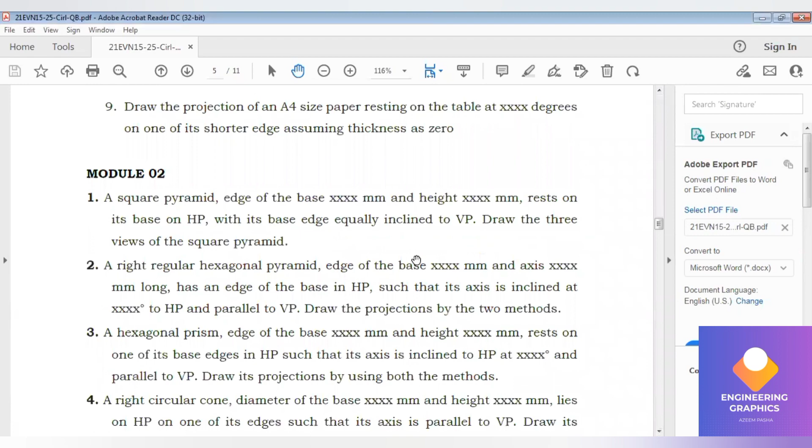You can see that it is from the VTU. So we will move on to the development of lateral surface of solids. Okay. So we have completed the isometric.

So you can see in module 4, the first question is: a pentagonal prism of side dash mm and height dash mm has one of its faces parallel to the VP. It is cut by a plane perpendicular to VP and inclined at dash degree to HP, passing through the axis at a point dash above the HP. Draw the development of the lower portion of the solid.

So first I'll be constructing an XY line here. We know that prisms will be constructed using the parallel line method. So draw the XY line. Okay. So go to polygon by center command. Select number of sides 5. Okay. Select thick line and place it so that one of the sides is parallel. So this is how we have to place it.

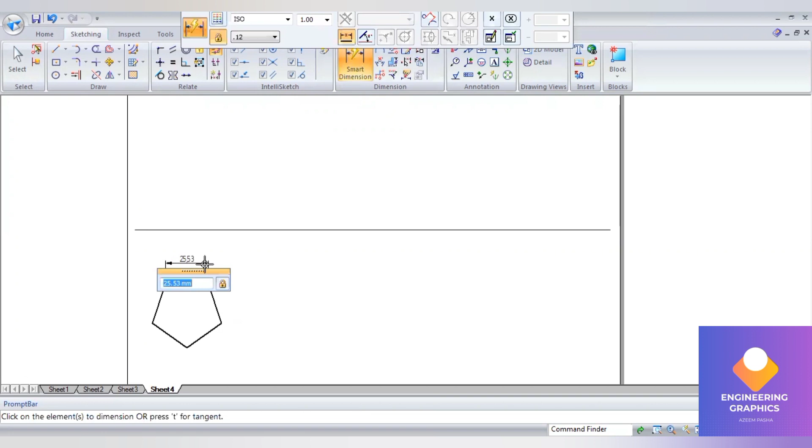Now I am changing the dimension to 30. Okay. This is the pentagonal prism resting with one of the edges parallel to VP. Now draw the 3 perpendicular bisectors to find out the center of it. Now give the namings here. It has both a top face and a bottom face. Top face notations are A, B, C, D, E, and bottom face notations are A1, B1, C1, D1, and E1, and those should be written within brackets.

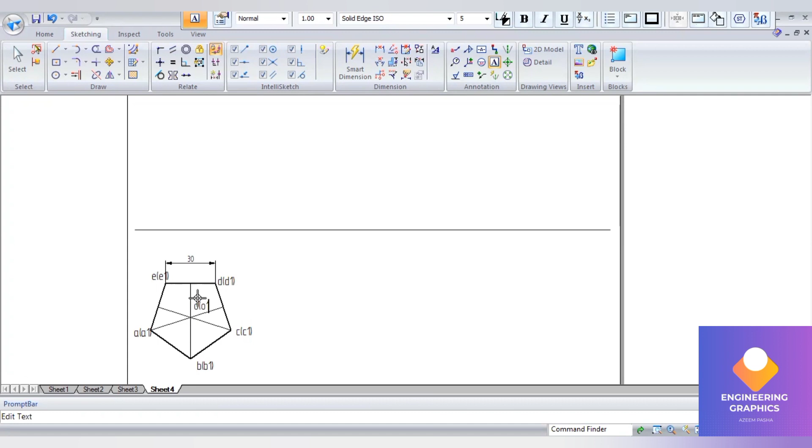Okay, after writing the notations, we should draw the projection lines. So take 0.13 mm thickness line. So draw the projection lines. For the axis length, we will give 60 mm. 60.

So construct the front view. We know that in the prism, the front view will be a rectangular face. Okay.

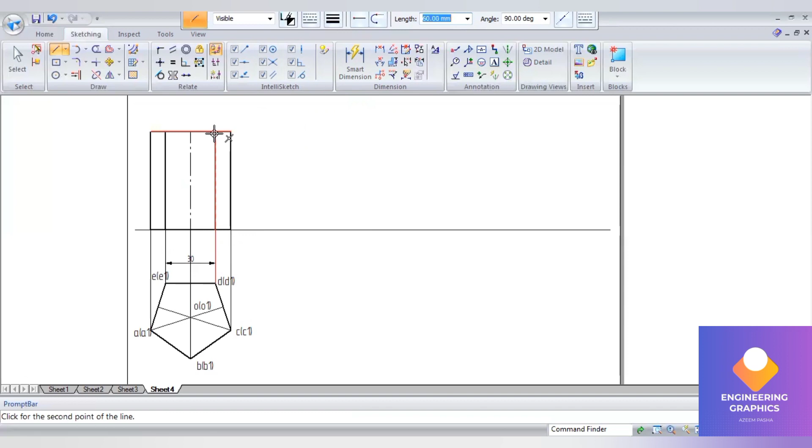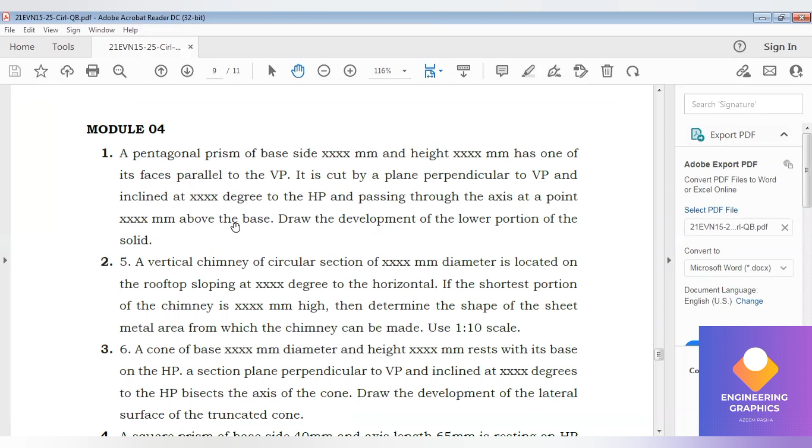Now it is cut by a plane perpendicular to VP, inclined at dash degree to HP, and passing through the axis at a point above the HP. So here, from the bottom face, I'll be considering a distance of some 30 mm, and here I'll be drawing an angle line from the middle point of it. Okay. So here we can choose the angle randomly. I'll choose 40 degrees.

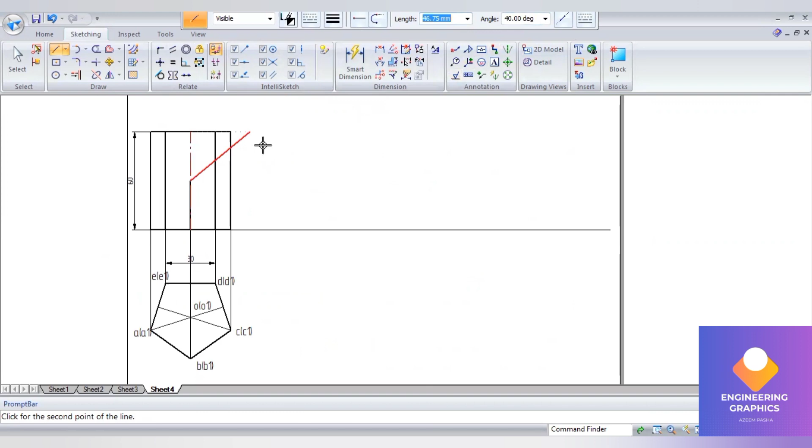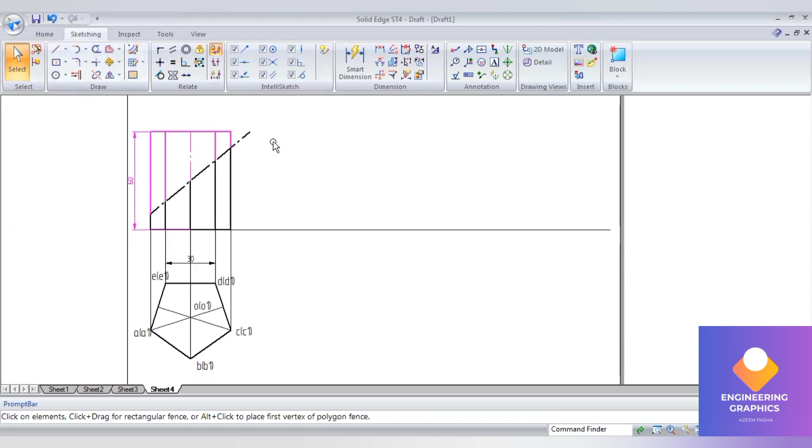Construct the cut plane, and then extend it so that it shows where it will be cut. And now using the split command, you can split wherever you want. Then make the upper portion thin, because the retained portion is what we need to draw the development of. So I'll be selecting that upper portion and making it thin.

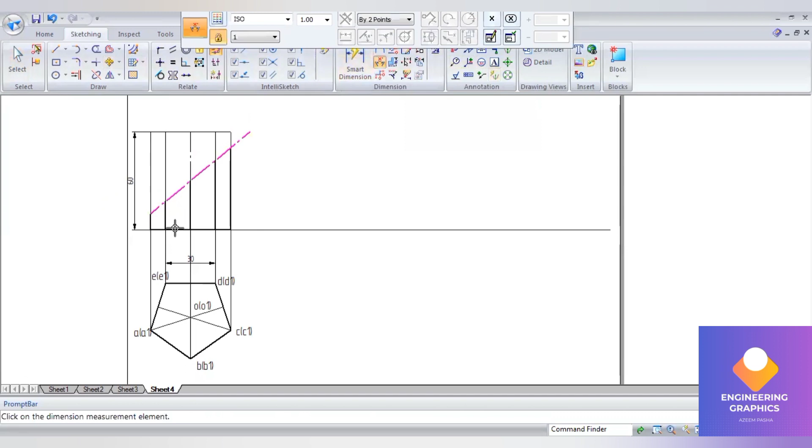Now you can write down the notations for the cut plane. You can check the angle. The angle with respect to HP is 40 degrees. Now I can write the cut plane namings. So here it is 1 with respect to the vertical edge. No, it's not cutting there. Actually, the cutting is happening exactly at the vertical edges, not in between. I'll correct it.

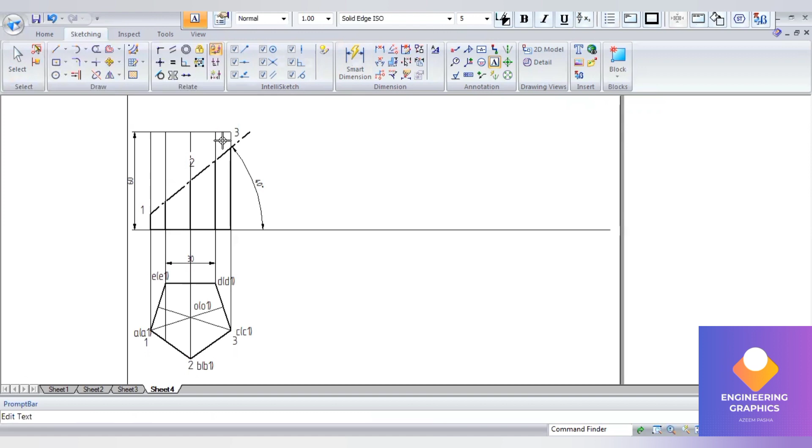Okay, exactly at BB1 we have cut point 2, and exactly at CC1. So 1 is cutting at vertical edge AA1, 2 at vertical edge BB1, 3 at vertical edge CC1, 4 at vertical edge DD1, and 5 at vertical edge EE1. Okay.

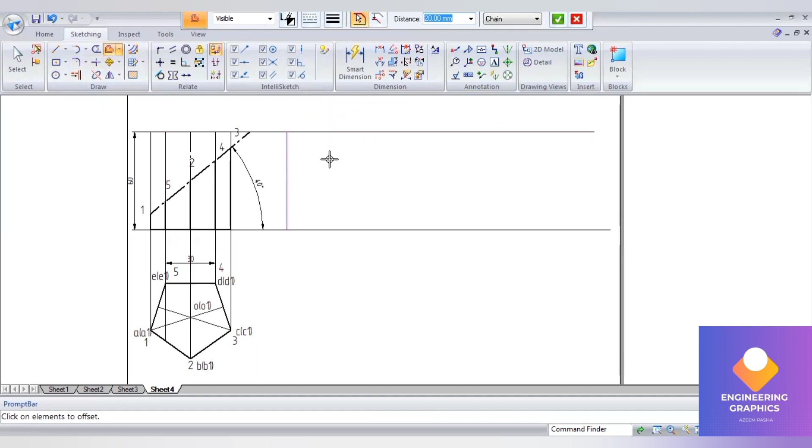Now draw a parallel line and make that line continuous. Now I'll draw one vertical line here. Using the offset command, I'm going to offset it by 30 mm. Total 5 faces, because it is a pentagonal prism. The total length we get is 150. Give the naming here: capital A, B, C, D, E, and A.

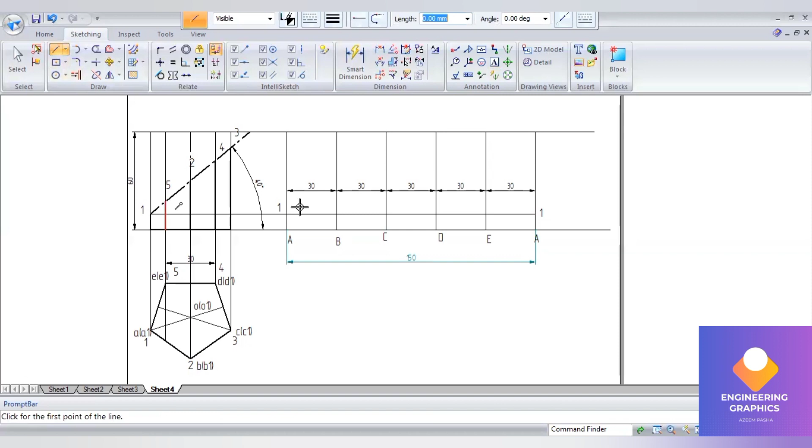Now we have to draw the projection from these cut points. Point 1 is cutting exactly at A, so draw a straight line till it cuts vertical edge A, and we can write 1 here. From 5 it is cutting on the E edge. From 2 it is cutting on vertical edge B. Write these down to avoid confusion.

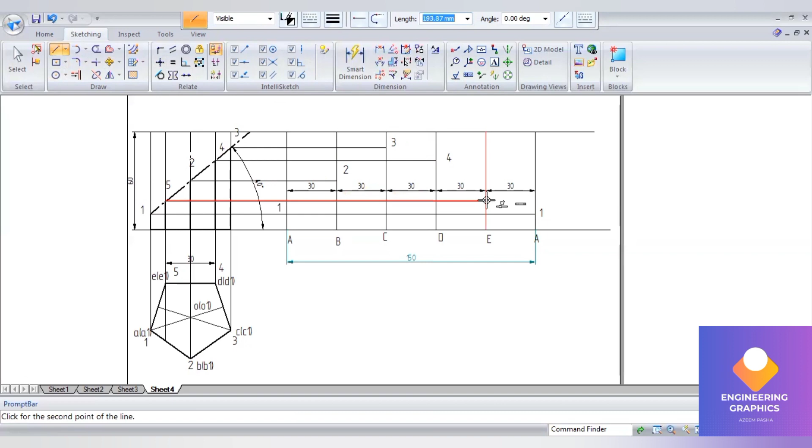And from 3 you have to draw the projection line; it is cutting at C. Then from point number 4, draw the projection line; it is cutting at D. And from 5 also draw a projection line, cutting at E. Now we have to join all these with straight lines.

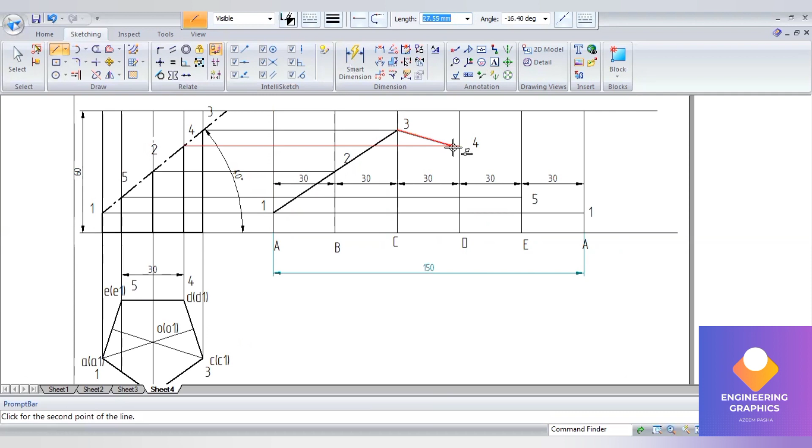So I'll be drawing the vertical edges from 2, 3, 4 and 5, to indicate the cut portion.

Okay, now we move on to the next problem. Problem number 2: a vertical chimney of circular cross section, dash mm, is located on the rooftop sloping at dash degrees to the horizontal. The shortest distance of the chimney is also dash mm. Determine the shape of the sheet metal from which the chimney can be made. Use 1:10 scale. So vertical chimney means it is having circular cross section.

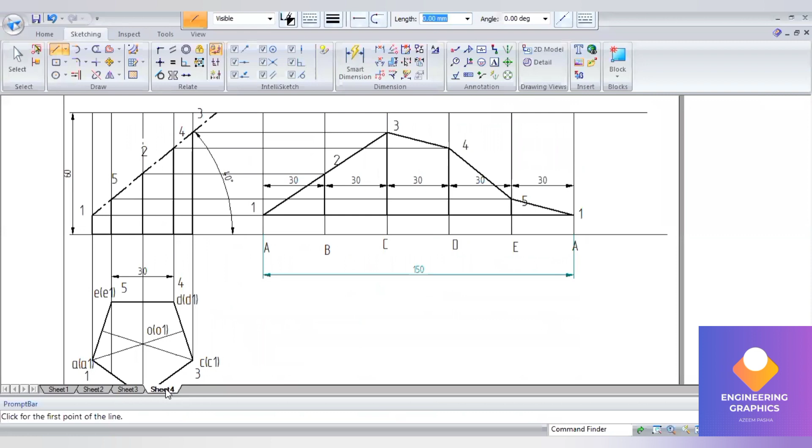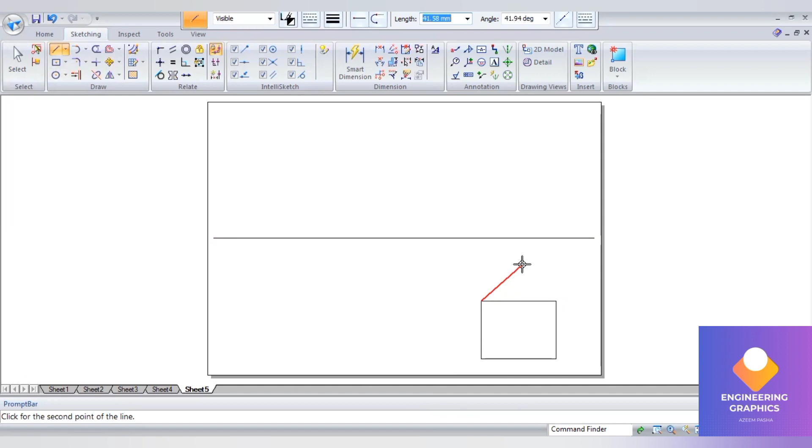So I'll be drawing a circle for a diameter of 50 mm here. First I will draw one horizontal line. We know that this is also resembling the cylinder. So first I will construct one simple house here to demonstrate. Above it I will be constructing a chimney so that you will get an idea how the problem has been demonstrated. So this is the chimney on a house, right?

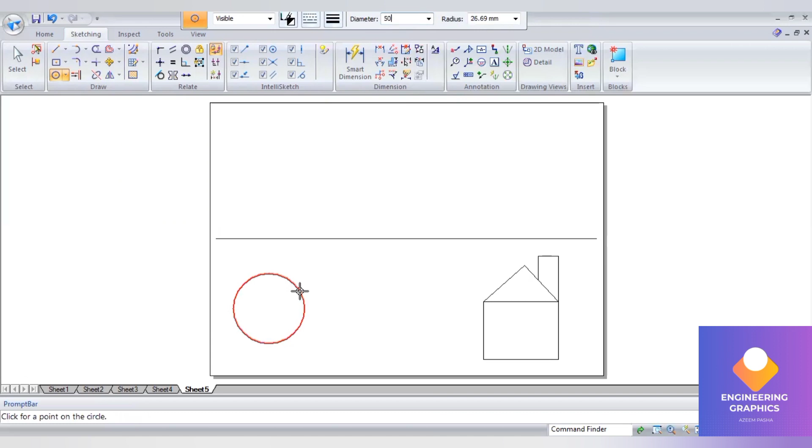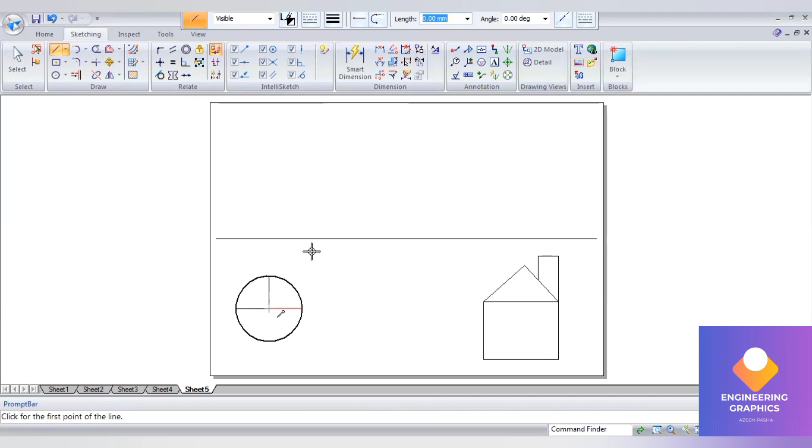I can see the chimney having some slope distance and it has been inclined at some angle, right? So here I'll be assuming the dimensions and constructing it. So give the diameter 50. Here for easier construction I'll be dividing this circle into only 4 equal parts, not into 8. That will make the problem easier. Okay. You can write down namings for it.

Now draw the projection lines to draw the front view. Here we don't know exactly the height of the chimney, but we have the height from the slope distance, that is from the cut angle point. So randomly I'll take some length here, then we can join and draw the front view. Then when we get the exact cut point, we can change it. Okay.

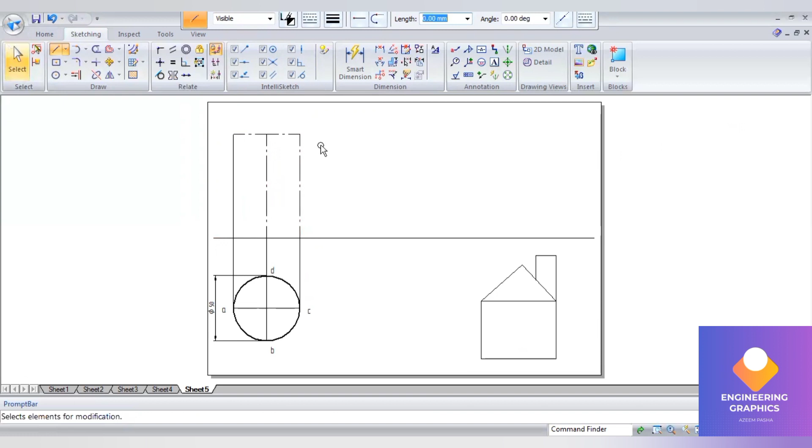Now here you can see it is a sloping rooftop. We have to show the angle with the horizontal here to indicate the rooftop sloping at dash degrees to the horizontal. After getting that angle, we can show the shortest portion of the chimney from there for a height. So now I'll go to the section plane, and from one end I'll be drawing an angle line. Okay.

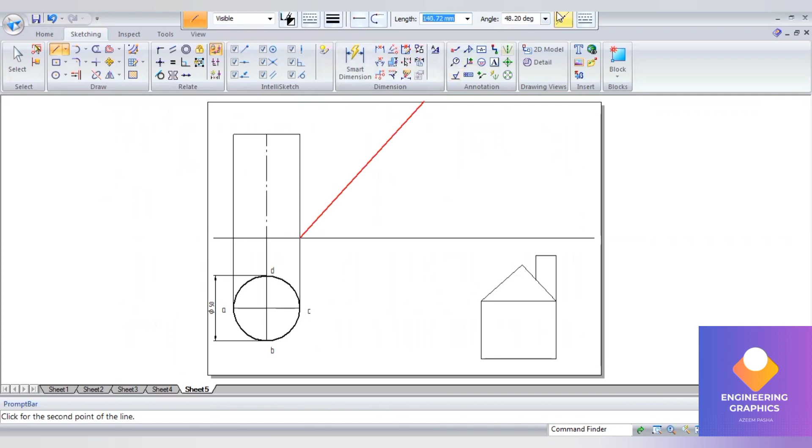Yes, from this end I'll consider the angle plane. So go to angle and you can give the angle here. A 30-degree figure will look like this. I'll take the angle here, I'll give some 135 degrees. So this is the angle line indicating the slope angle.

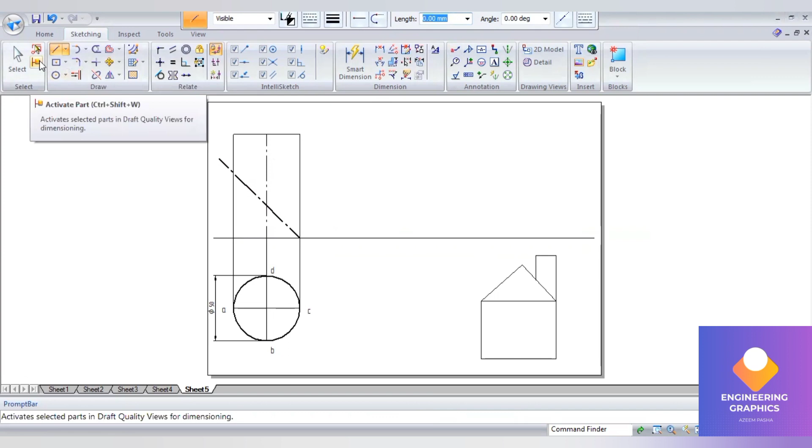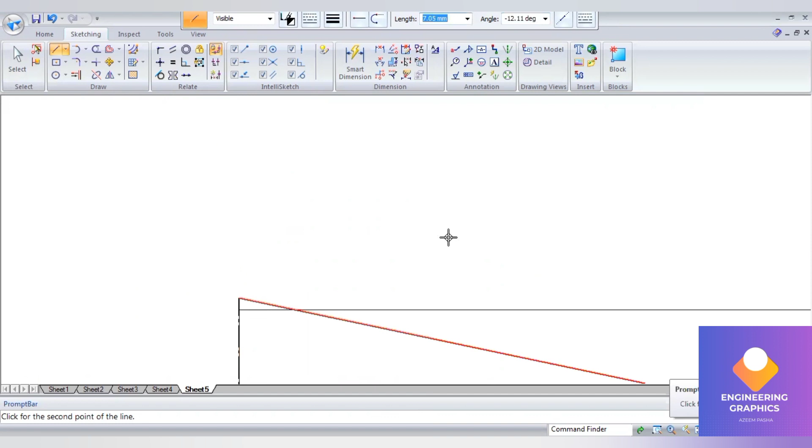And then the shortest slope distance I'll consider here as 30 mm, because they have not given any dimensions in this problem, so I'm just assuming the dimensions and then constructing it. I think I did this problem in the development of lateral surfaces of solids, so you can go to the playlist and see it with the dimensions. This is the question bank problem, so I am doing it by assuming.

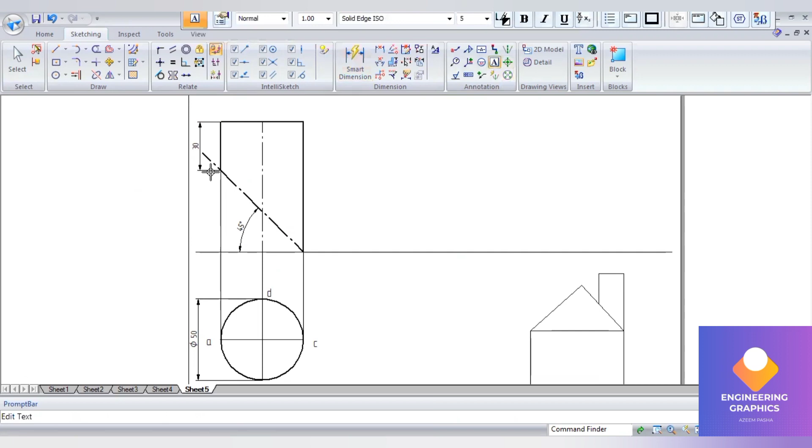You can see the angle of inclination here I have given 45 degrees, and the slope distance I have considered 30 mm. Now we have to draw the development for this. Wherever the cutting has happened, we need to mention the cut points with numericals. So here at A it is 1, at vertical edge B we have 2, at vertical edge C we have 3, and at D we have 4.

Now draw a parallel line here, from this end. Consider one vertical edge here. From here the distance we should consider is pi d. Using the pi d formula, with diameter 50 mm, you will get 157 mm. Using the calculator you can find the distance 157 mm.

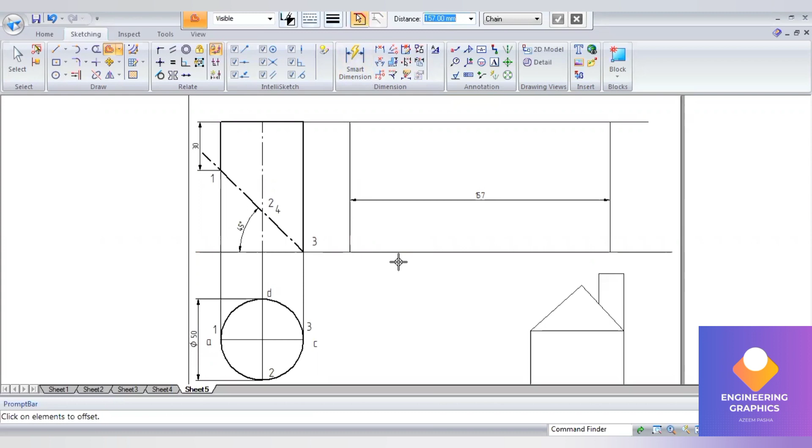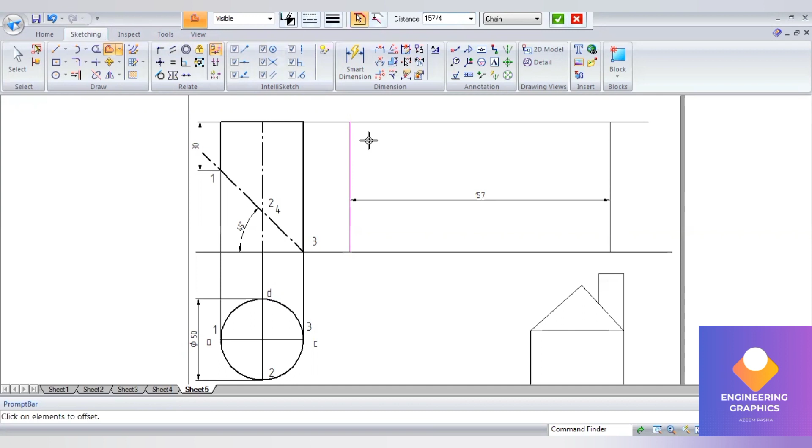Now we can divide this 157 into 4 equal parts. You can give 157 divided by 4 in the offset command itself, and we'll get 39.25. So it is divided into 4 equal parts. Now draw the projection lines from these cut points here. Before that, I'll be marking these vertical edges with capital letters.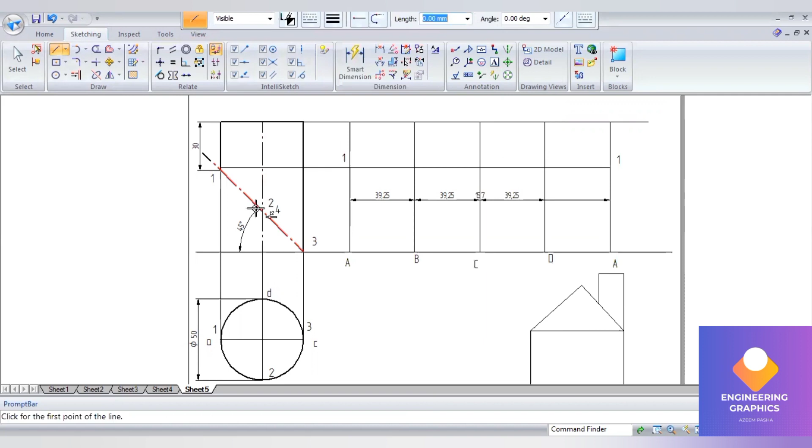So this one, it is cutting at the vertical edge here. That's why it is extended till there. And then from point 2 and 4, it has been cutting. 2, it is cutting on the vertical edge of B, and we can extend it till D also, because 2 and 4 are on the same point. So this is our point number 2, and 3 exactly lying on the point C at the bottom end. Okay, we can extend this in order to show the number 4 here. Okay.

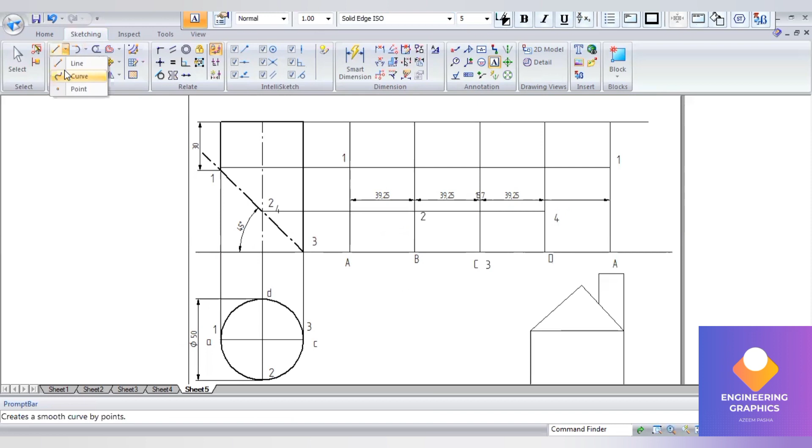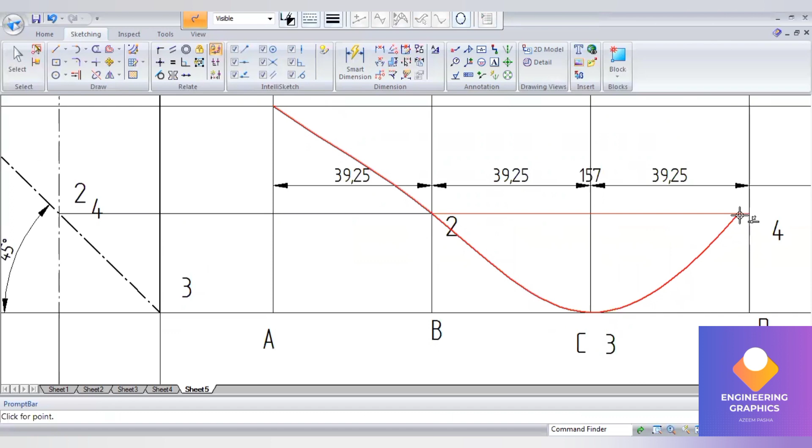Okay, this is a circular portion, so I will be going with the curve command here. So joining from 1 to 2, 2 to 3 we should go, and then from 3 to 4, and then 4 to 1. This is where cutting is happening. So I'll draw another line here to indicate the top portion.

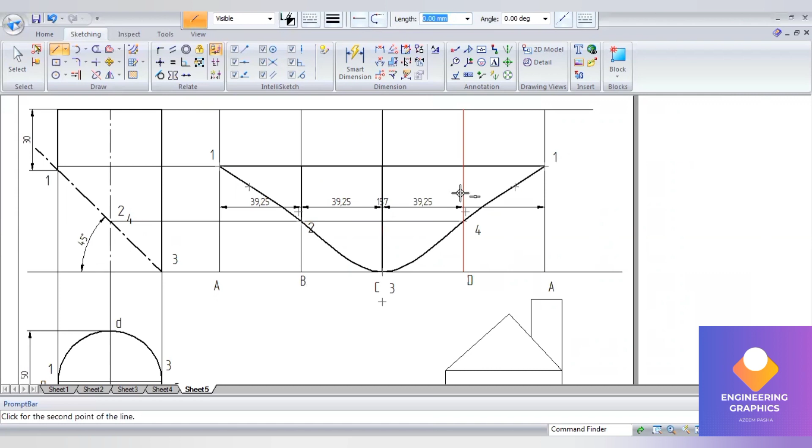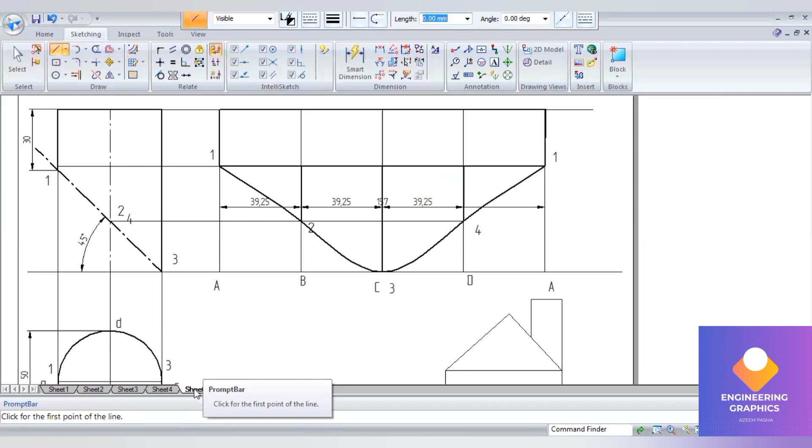You can see that I'm indicating till here it has been cut. Okay, this is the cut upper portion. So you can show the thick line here also. Okay, so that completes the problem. We'll move on to the next problem.

The next problem, it is a cone problem. A cone of base diameter dash mm and height dash mm rests with its base on the HP. A section plane perpendicular to VP inclined at dash degree to the HP bisects the axis of the cone. Bisects means exactly the middle point of the axis. Okay, bisect the axis of the cone.

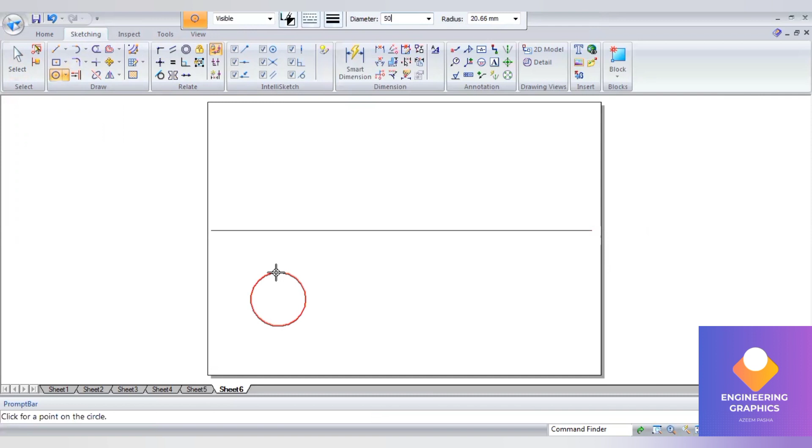Draw the development. So here you draw an XY line, or a smaller line also possible, because this is not drawn with the parallel line method. This is having slanted line we should consider here. I'll consider the diameter 50 mm for the cone. Base of the cone is a circle, so it is drawn with the diameter 50, and here again I am dividing this circle into 4 equal parts. Okay, so by doing 4 equal parts it is easy, and we can construct it easily.

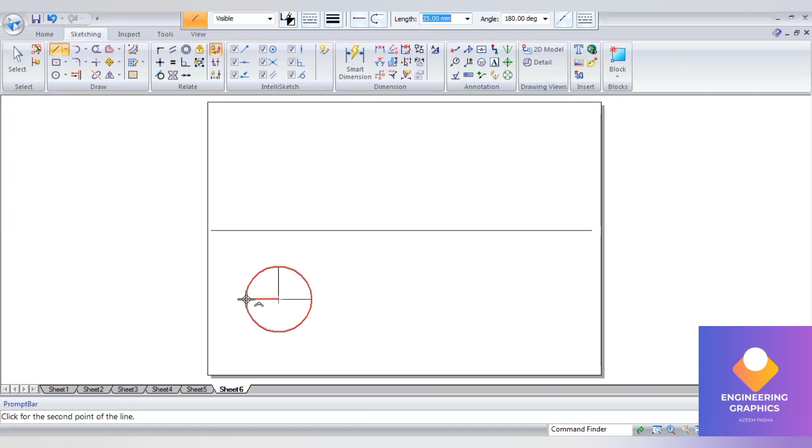For 8 parts it will take a little bit more time. So if you want, you can do it with the 8 parts also. So for you people to understand, I am showing with only the 4 parts. So write down the namings. Okay, draw the projection lines upward to complete the front view.

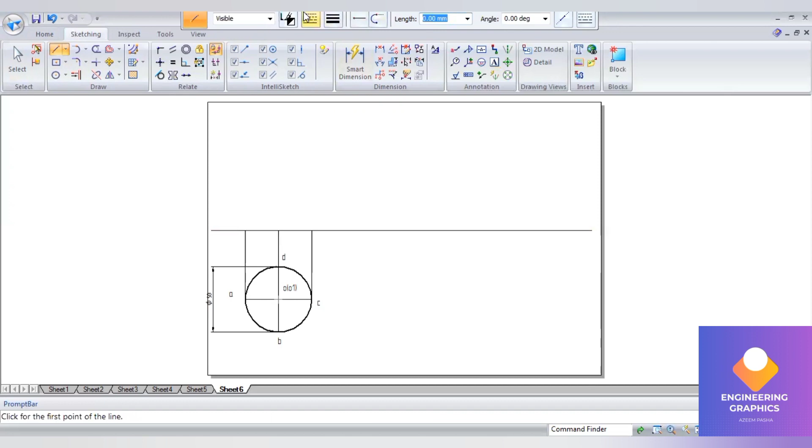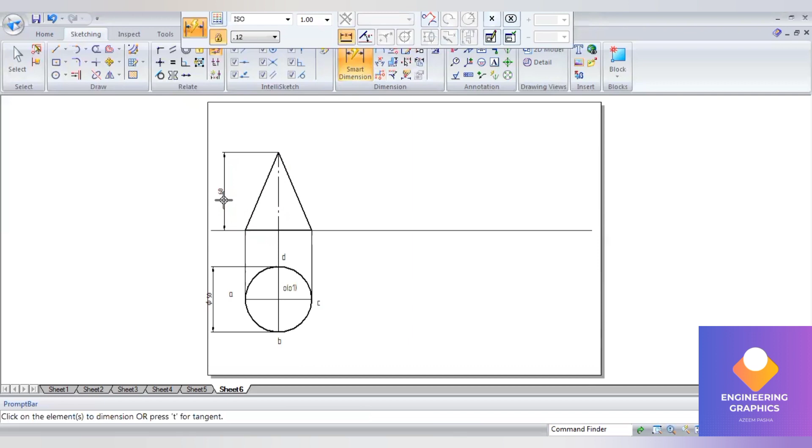Axis length here I'll be considering 60 mm. Axis height of 60. Show the dimensions. Okay, so this is drawn with the slant edge length, so we don't require a parallel line here. Okay, so you can show that slant edge length, that is capital R, 65 mm.

You can mention slant edge, capital R is equal to 65 mm. Okay, and small r, that is radius, it is 25. To find out the development of this, we have the formula. That is small r by capital R into 360 degrees. So that's how we can find out the development of the cone. Okay, remember it, small r by capital R into 360 degrees.

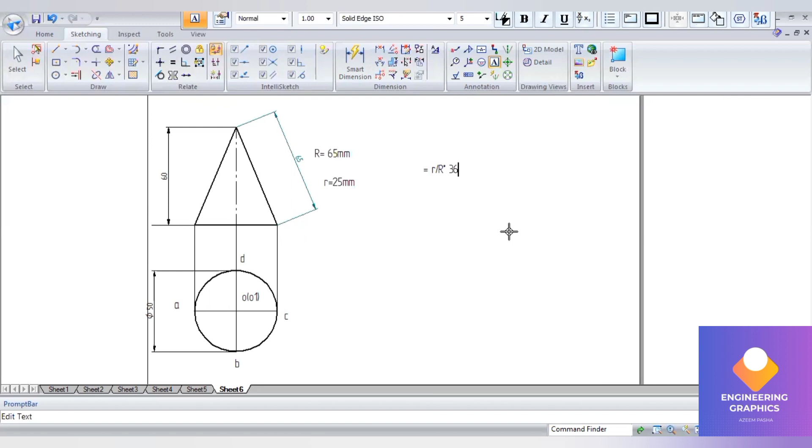So you can use the calculator here to find out how much the angle is. The angle we are getting is 138 degrees. Okay, 138 degrees. So first we have to draw one vertical line or horizontal line, whichever it is, for a length of 65 mm, that is capital R, and then go to arc by center,

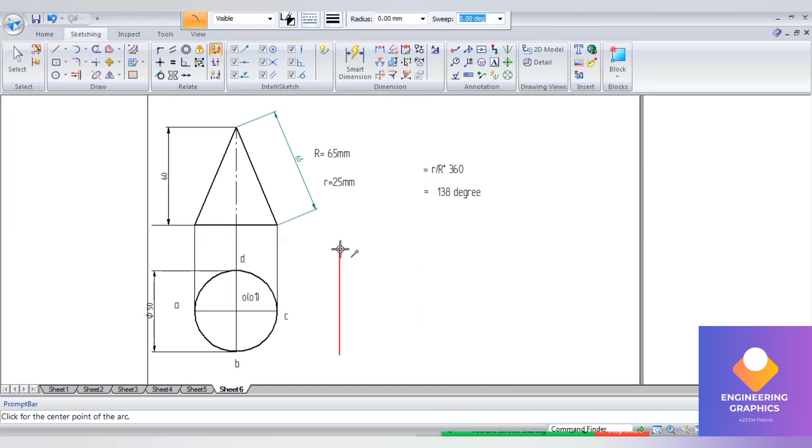select this 65 mm and give the angle, that is 138 degrees. Okay, you have to give the angle here. The radius length is fixed, that is 65, and here you have to give the angle, that is 138 degrees. Okay, this is the development of it.

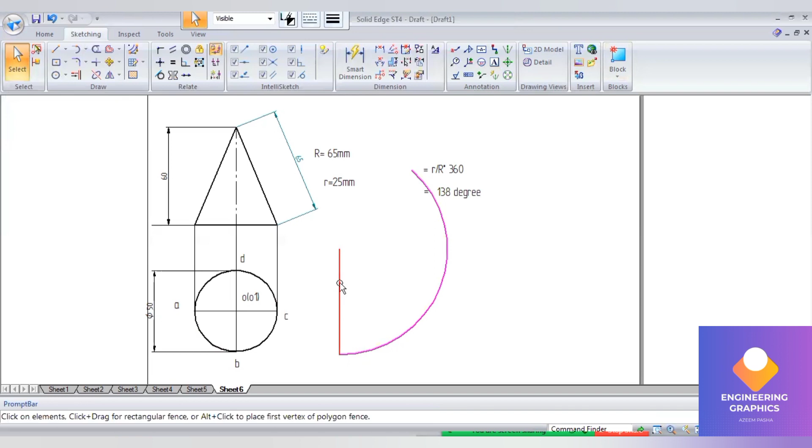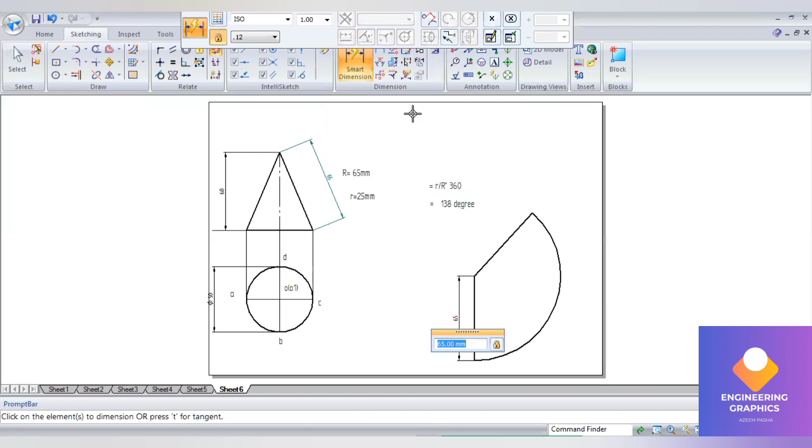So select this portion and keep it properly in a space so that you can see it properly. Okay, making a copy and moving it. So I'll just delete that one part. Okay, this is the development of it, but we need to show it with the cut plane here. So you can show the dimensions and the angle, no problem, but we need to show the angle line here. This is what you can say the basic problem,

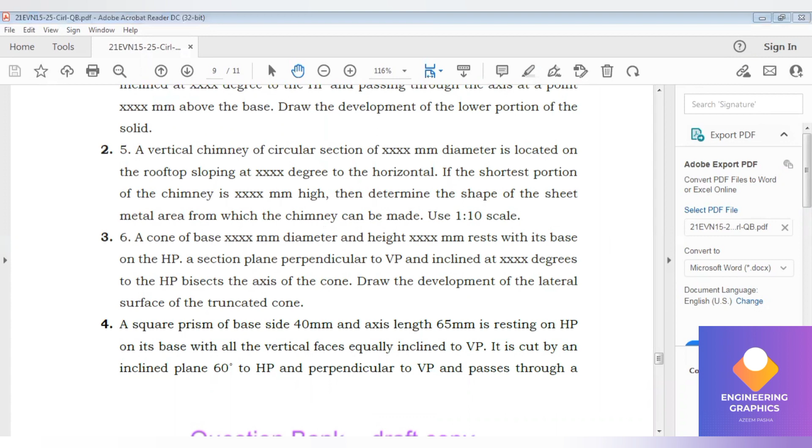but we have to show the cut plane. A section plane perpendicular to VP inclined at dash degree to the HP bisects the axis of the cone. Bisect means it is exactly the midpoint we should consider. Okay, so midpoint, you can see this is how you can find it. This is the midpoint symbol, and here we have to take the angle. So here the angle considered is 45 degrees. Extend to next. Okay,

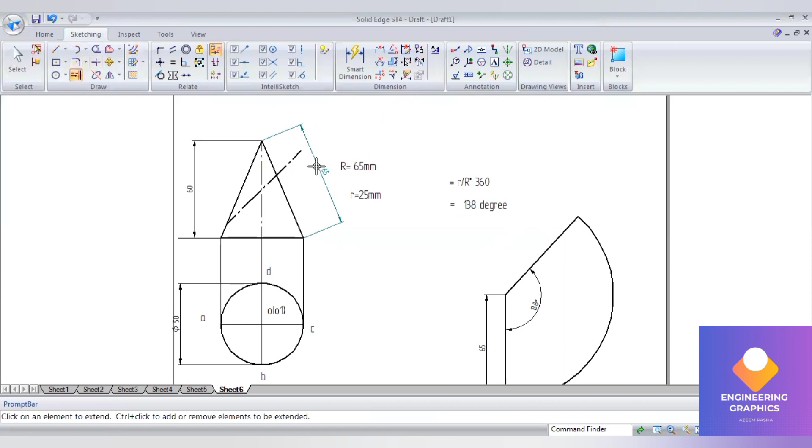now we can show the angle, and again you have to find out the development of the truncated cone, that is the lower portion of it. Okay, with the help of the split command, I'm going to split it to find out the exact points here.

Okay, make those lines as thin lines, 0.13. Okay, we can mention 1 2 3 here, but we should project these 1 2 3 points. Okay, 1 2 3 4 points on the slanted length. We have the slanted length of 65 here. Okay, we have to project all these points here. That's what I'm going to do.

Okay, from here horizontally draw to the slanted length. Okay, we can just project it, and this is 1, and this is 1 on the slanted, and this is 2. Okay, and this is 2, and 3 we have here, and 4 we have here.

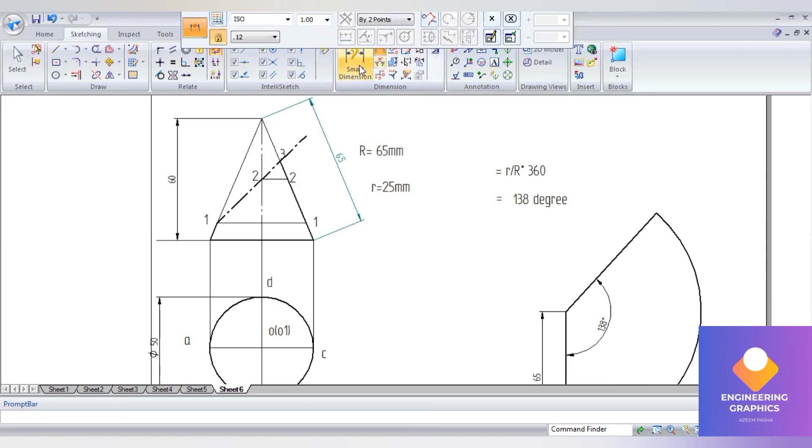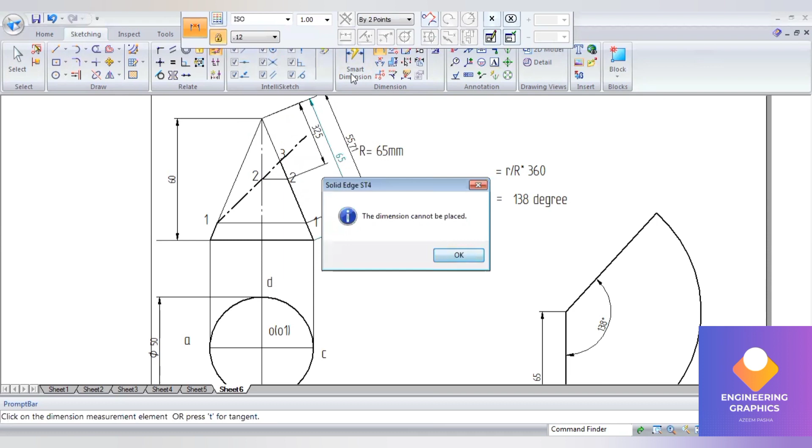So we can measure the dimensions here from that exact apex point to here, that is 55.71. Then from that apex point to point number 2, we can measure the dimension. That exact length we should measure using distance between 2 points. So you can change that using the distance between command, right? You can change that option here, and then you will be able to measure it to the exact points. Okay, these are the dimensions we get: 55.71, 32.5, 22.94.

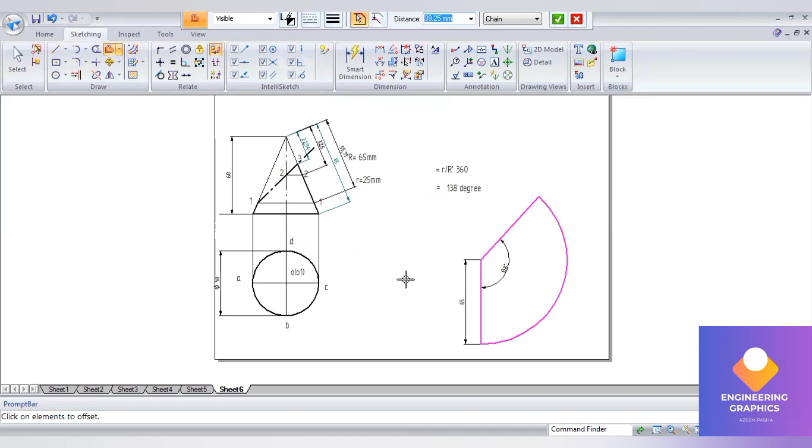So for now, first we have to divide this arc area, that is the cone area, into 4 equal parts. Okay, so to divide this into 4 equal parts, we have to use the arc by center command. Okay, arc by center command, we can do it. So here in Solid Edge ST4, we cannot divide that area using the angle command. That means we should go to the arc by center command only.

First I will take that 65 mm length and cut 2 arcs exactly at the middle, 65, and cut it. From that extreme point, okay, end point, you have to consider that 65 mm length.

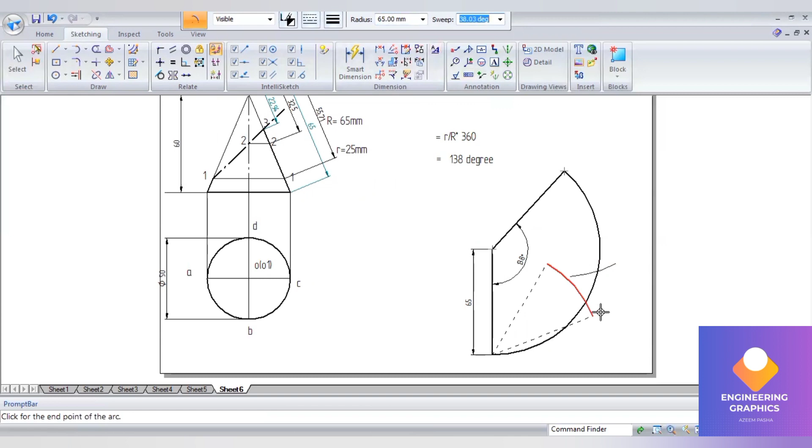So cut 2 arcs and join this, get the exact point here, the center point. So from this center point we can draw a straight line connecting it. So now it is divided into 2 equal parts. Okay, the same way from that exact point, you can consider any length.

Again, from those 2 extreme points, we should consider the length and cut the arc, so that we can divide these 2 equal parts into 4 equal parts. Okay, yes, from this extreme point you can consider any length. Okay, here I'll consider 50. So cut the arc. The same way you can do it on the other side also. Consider 50 mm. Cut the arc.

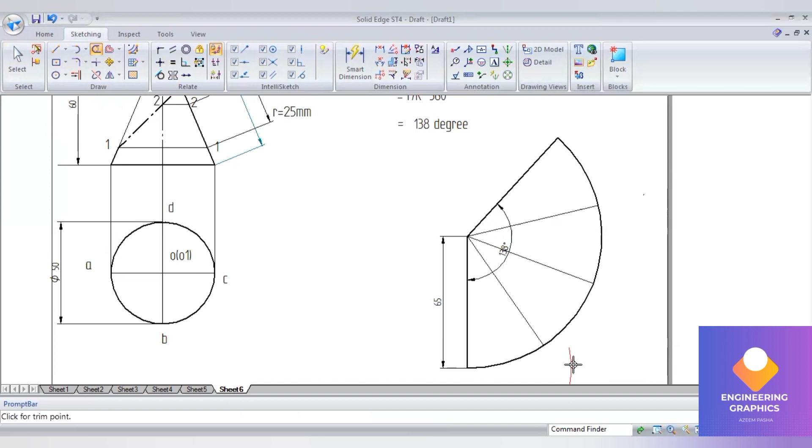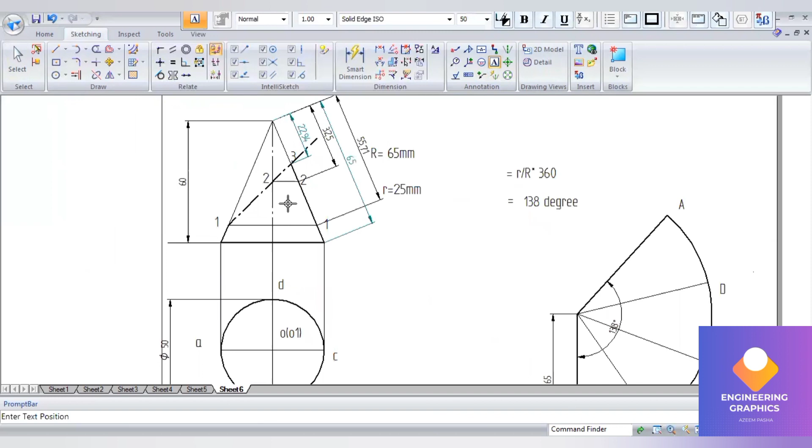Okay, now we are going to trim out the extra lines here. And we can mention the namings here, with capital A, capital B, capital C, capital D, and capital A. Okay, the first length we should consider on the vertical edge here, it is 55.71. Okay, to get that exact point number 1, go to arc by center. Consider a radius of 55.71. Enter and cut the arc.

Okay, the same way you can do it on the vertical edge of A, 55.71. Enter. Okay, these are your points 1 here. Now on the vertical edge D we have point number 4. Point number 4 and point number 2 are the same length. I'll consider 32.5. Cut the arc, and the same way you can do it on the vertical edge B here, 32.5.

Cut the arc. Now on the vertical edge C you need to cut it for 22.94. So give the radius. Okay, cut it. Now I can write the naming for it. So this is 1, this is 2, this is 3, and this is 4, and this is 1.

Now connect all these points using the curve command here, because this is a cone. So go to arc and go to curve command and connect all these points. Okay, go to curve command here.